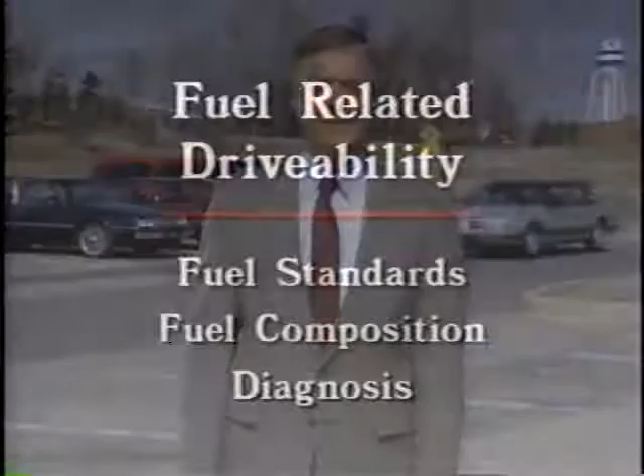We're at the GM Proving Grounds to look at part of the fuel story. The emissions lab here at the Proving Grounds tests a wide variety of automotive fuels to assure that all GM vehicles perform up to specs and meet every EPA emission standard. Let's begin by looking at fuel standards and composition. The emissions lab tests consumer-marketed fuels to set the standards for new vehicle computer calibrations.

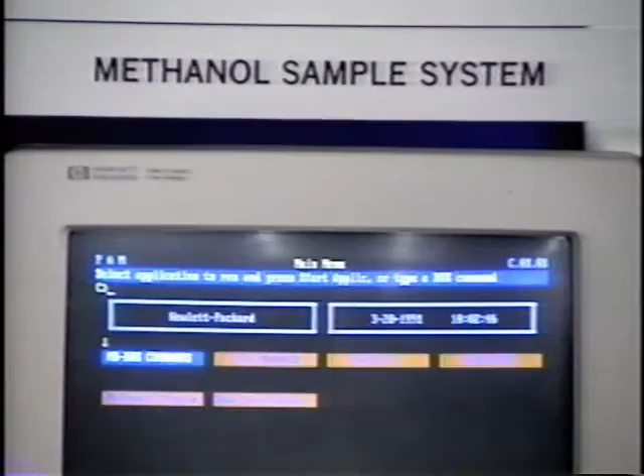Joining me here in the emissions lab is Les Milvick, a GM fuels engineer. Hi, Ken. Les, is choosing the right fuel, a good gasoline, really a matter of luck? You might say that, Ken. In the real world, motorists buy generally what's available. Our advantage here in the lab is that we actually distinguish between good fuel and bad fuel.

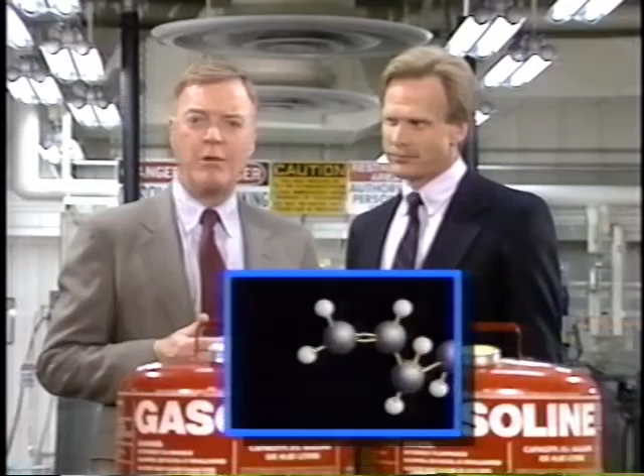The common automotive fuel, gasoline, is composed of liquid hydrocarbons. That's correct. Now, a hydrocarbon molecule contains hydrogen and carbon. There are hundreds of different hydrocarbon molecules that make up gasoline. And because there are thousands of ways to mix or blend gasoline, each oil company makes their gasoline just a little bit different. But there are only three primary hydrocarbon types in gasoline: aromatics, olefins, and paraffins.

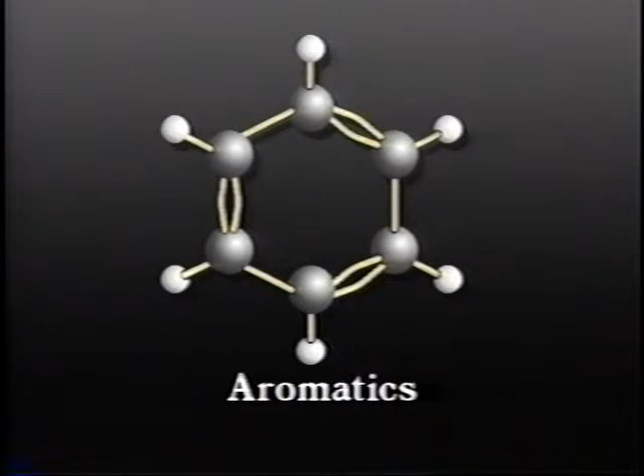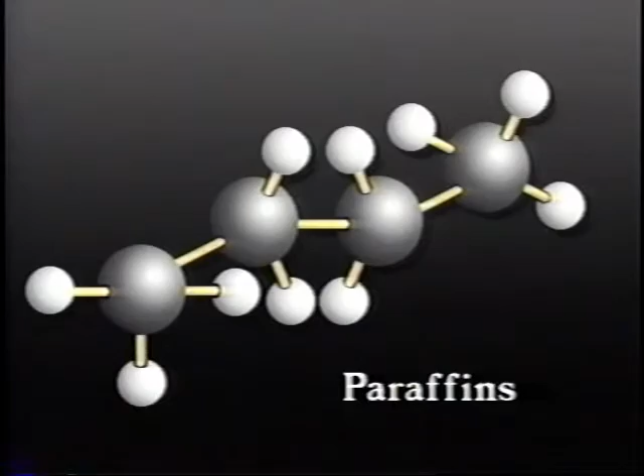Aromatics have a circular carbon arrangement. Olefins have a carbon double bond. And paraffins have a carbon single bond. Now, this equipment divides a gasoline sample into the separate aromatics, olefins, and paraffins. Yes, and this instrument does that separation. And that information is transferred to this computer, and on this screen I can see each individual hydrocarbon. Then I can take and group that information into aromatics, olefins, and paraffins.

Olefins and aromatics contribute to the octane quality of the fuel, and the paraffins make up the balance of the fuel. Aromatics, olefins, and paraffins exist in simple and complex form. In other words, small and large form. And the smaller paraffins are very volatile, meaning that they evaporate very quickly. That helps start the engine in the morning. The large paraffins are less volatile, but contain more energy.

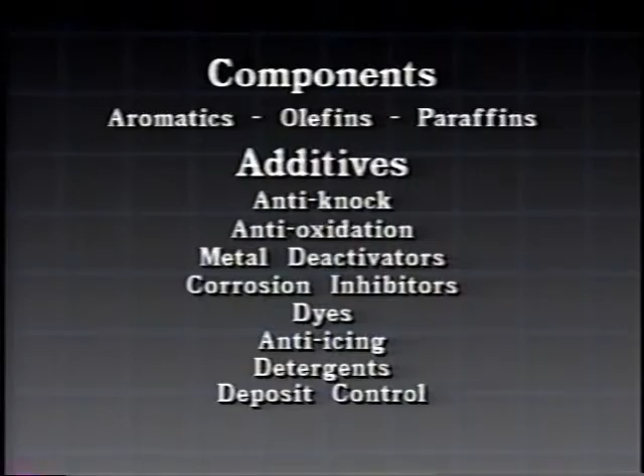In addition to gasoline's three major components, oil companies blend anti-knock agents, anti-oxidation agents, metal deactivators, corrosion inhibitors, dyes, anti-icing agents, detergents, and deposit control agents to improve performance. For example, most fuels contain detergents and deposit control additives that help prevent and remove deposits which are formed in the combustion areas of the engine.

To help ensure performance, the American Society for Testing and Materials, commonly known as ASTM, sets standards for automotive gasoline. ASTM D4814 is the current specification for gasoline. Octane, volatility, copper corrosion, gum content, sulfur content, lead content, and fuel stability are defined. Of the regulated factors, octane and volatility directly affect drivability.

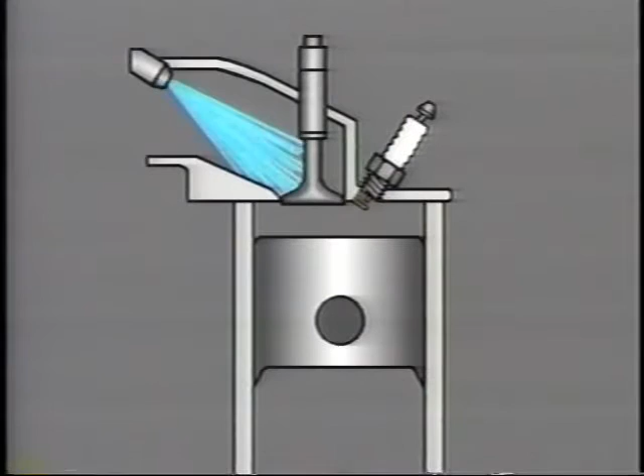During normal combustion, fuel mixes with air and evaporates before entering the cylinder. During combustion, the ignition system sparks the compressed air-fuel mixture. In a rapid, even progression from the spark plug across the top of the cylinder, the flame front advances and consumes the air-fuel charge. The heat generated from the burning fuel expands the cylinder contents dramatically. The force created from this expansion drives the piston downward.

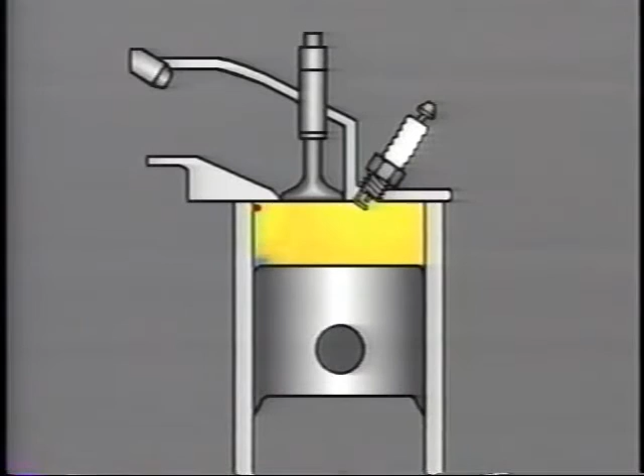Engine knock occurs after the spark plug fires, but before the normal flame front consumes the air-fuel mixture. Now in this case, an uncontrolled explosion of the compressed air-fuel mixture occurs from a red-hot engine deposit in the cylinder. If engine knock is not corrected, then serious piston damage may occur. Octane is a measurement of a fuel's anti-knock capability. The higher the octane number, the higher the anti-knock capability.

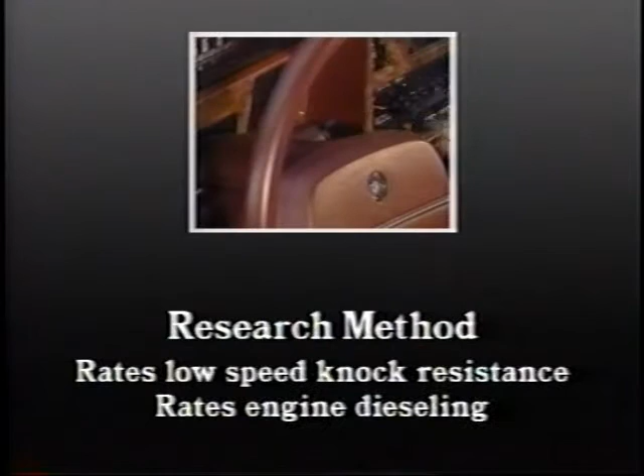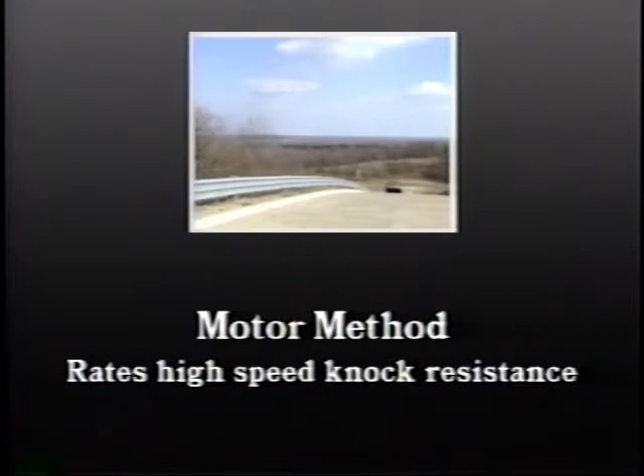Octane is rated using the average of two methods of testing, the research method and the motor method. The research method rates a fuel's ability to resist engine knock during low to medium speeds and to prevent engine dieseling or run-on. The motor method rates a fuel's ability to resist engine knock at part throttle and high speed, such as passing or hill climbing. The pump octane number is the average of the research and motor numbers.

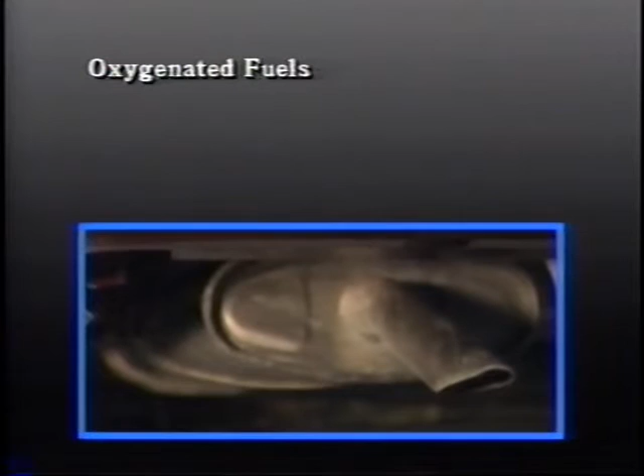Previously, lead-based additives served as octane boosters. Now, since lead is no longer a fuel component, oil refineries have been forced to find new octane boosters. Oxygenated fuels is one answer. Oxygenated fuels raise octane and lower tailpipe emissions. Gasolines with either ethanol or methanol added to the blend are two examples of oxygenated fuels. Ethanol and methanol are alcohol-based anti-knock additives.

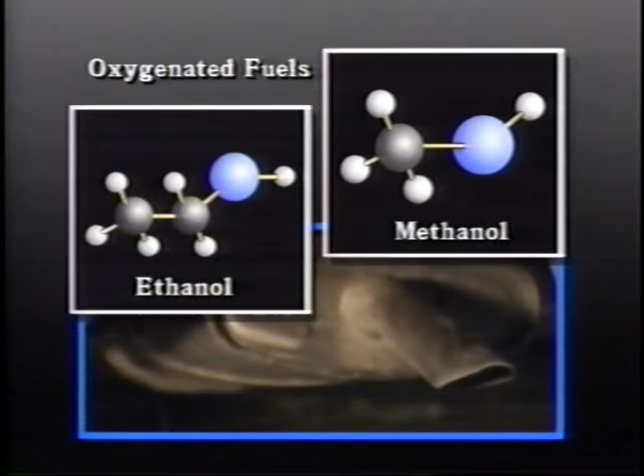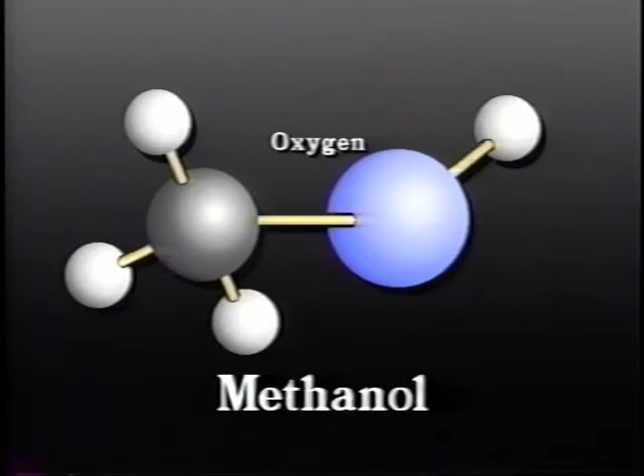Ethanol has the ability to absorb water, preventing fuel line freeze-up. But ethanol only absorbs water to a point. Beyond that point, however, any excess water causes the ethanol to separate from the gasoline. Methanol is 50% oxygen, so methanol raises fuel octane and volatility. Methanol is highly corrosive. GM recommends only using gasolines with 5% or less methanol.

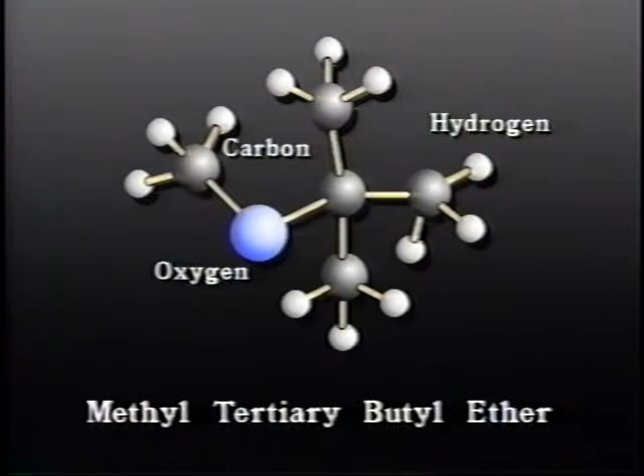Another oxygenated fuel is gasoline blended with methyl tertiary butyl ether, or MTBE. MTBE raises octane and is less sensitive to water than ethanol. The most common MTBE concentration in gasoline is about 8%, equivalent to about 1 octane number.

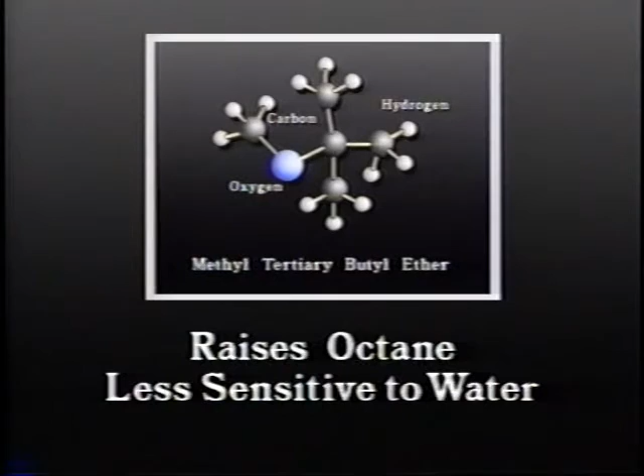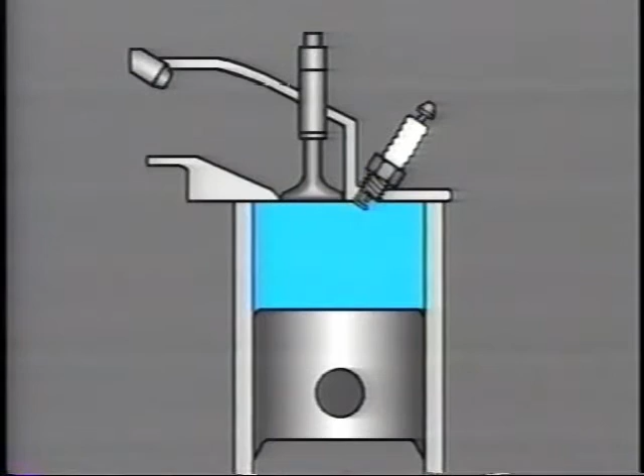Okay, now let's talk about volatility. Volatility is the fuel's ability to change from a liquid to a vapor. And that's pretty important because only a fuel's vapor will burn and not the liquid. But the evaporated and compressed fuel in a cylinder just doesn't burn when the plug fires, it explodes.

Nonetheless, summer blended fuel evaporates slower than winter blends and has a lower volatility. This prevents excessive evaporation and vapor lock. Winter blended fuel evaporates fast and has high volatility. This promotes good cold starting ability.

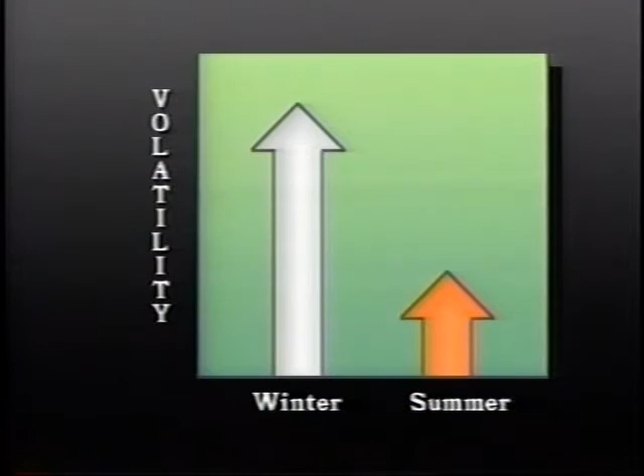In recent years, fuel volatility has generally decreased. This drop in volatility is significant. In fact, using 87 pump octane fuel may actually improve performance because the higher octane additives increase octane but decrease volatility.

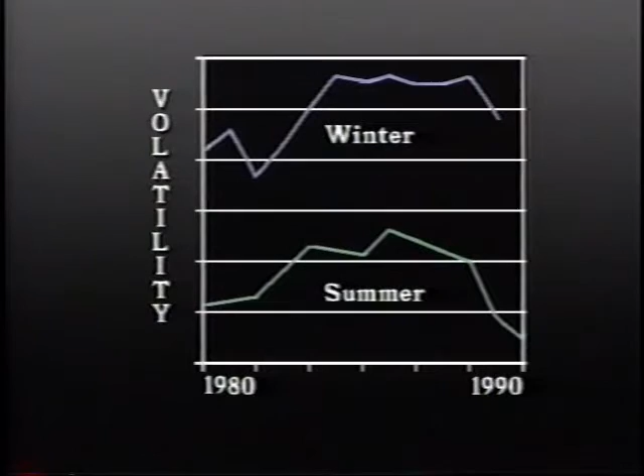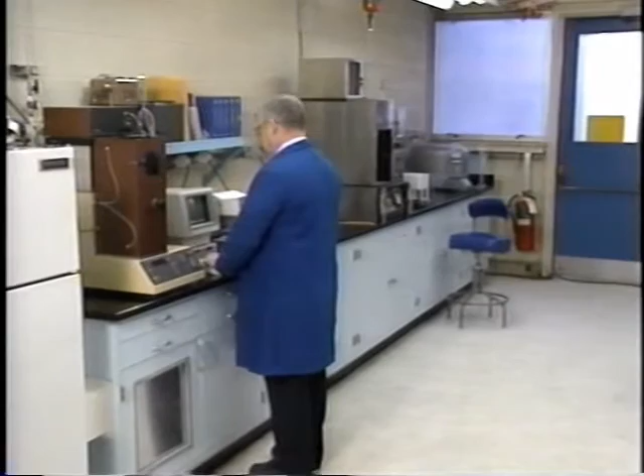Well, Ken, that about does it for theory. Well, thanks very much, Les. Would this be a good time to talk to Auburn Perkins? Now, that's a good idea. Auburn does all of our fuel analysis testing in this laboratory. This is General Motors Fuel Testing Lab, and this is Auburn Perkins. Auburn, nice to see you. Hi, Ken. Auburn, would you tell us exactly what it is that you do here?

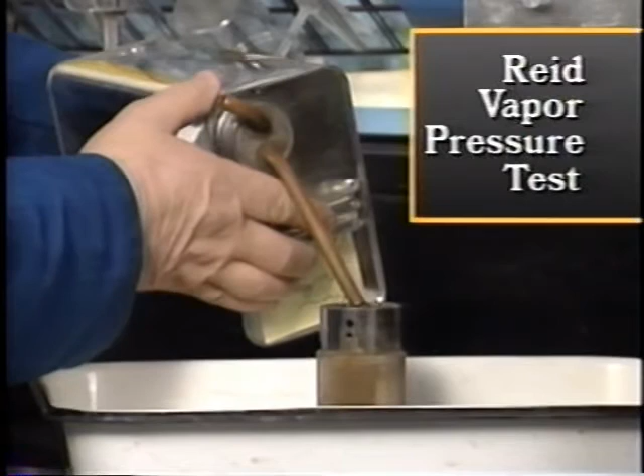Sure, Ken. This is a fuel lab where we check all incoming fuels to make sure they meet specifications for our test vehicles. First of all, we do a Reid vapor pressure test, a distillation curve, and fuel separations. Okay. Where do you start? With the Reid vapor pressure test. Before testing, we chill the fuel samples. They must be between 32 and 34 degrees Fahrenheit. Okay. A precise amount of fuel is poured into a test cylinder and sealed.

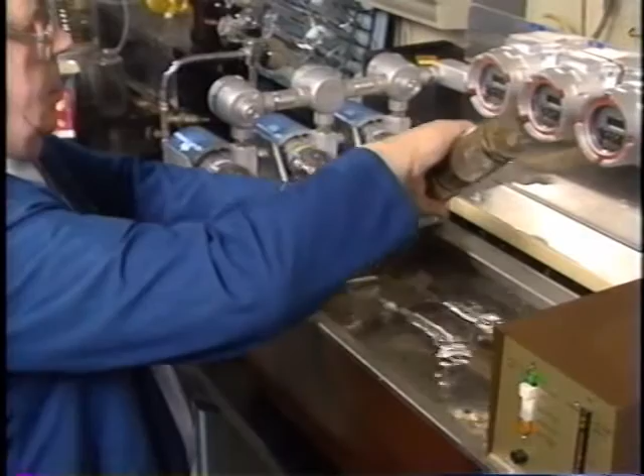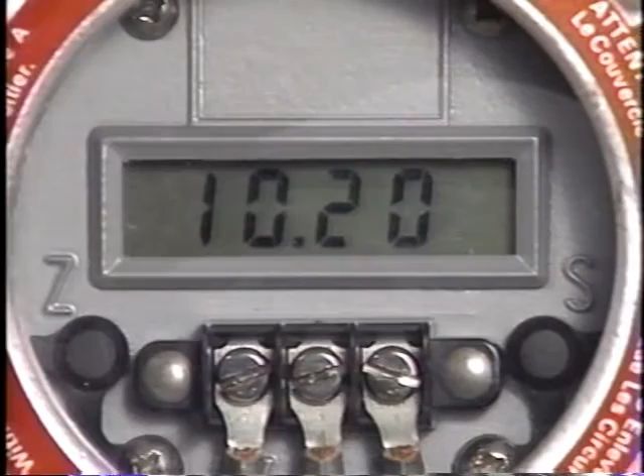The water bath temperature is held at a constant 100 degrees. When I immerse a container, the water heat makes the fuel vaporize. We measure the pressure created by the test. This fuel is at 10.2, which is typical of today's fuels. This is the Reid vapor pressure that's used to rate the volatility of all motor fuels? That's exactly right. Okay, and that's the same process used by the gas check kit available to a dealership. Right. Good.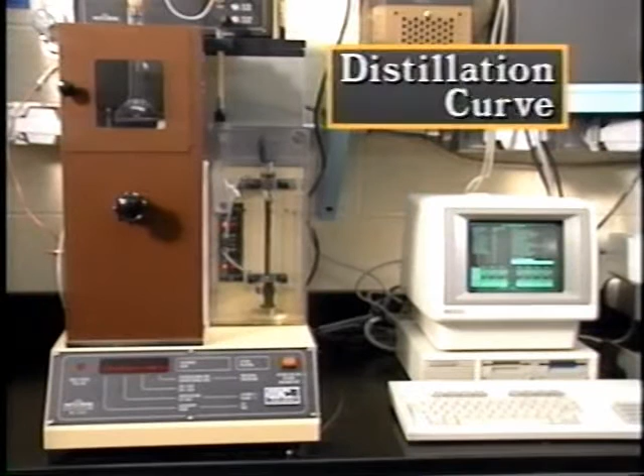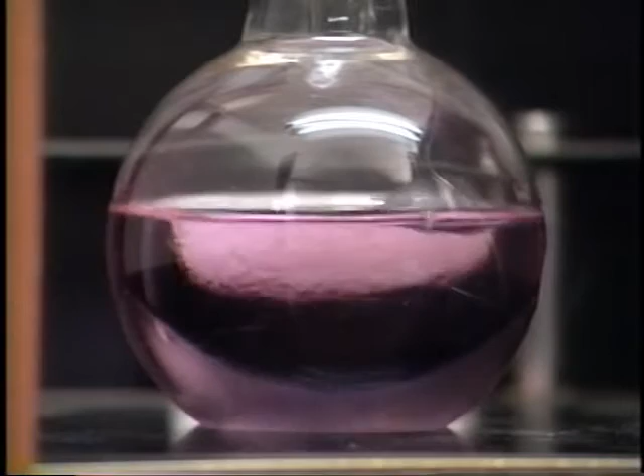And now would be a good time to do a distillation curve. All right. In this test, fuel is boiled and evaporated. The distillate is processed and it's measured. Sensors feed information to a computer. The printout shows the temperatures where fuel starts to boil, how it boils, and when the fuel stops boiling. The curve printout shows the exact volatility property of the fuel anywhere on the curve.

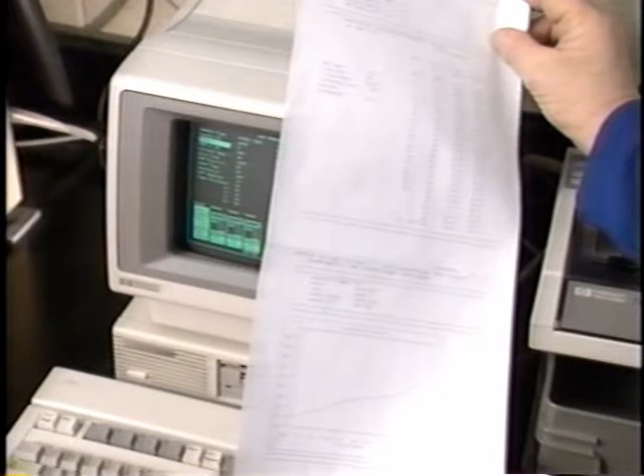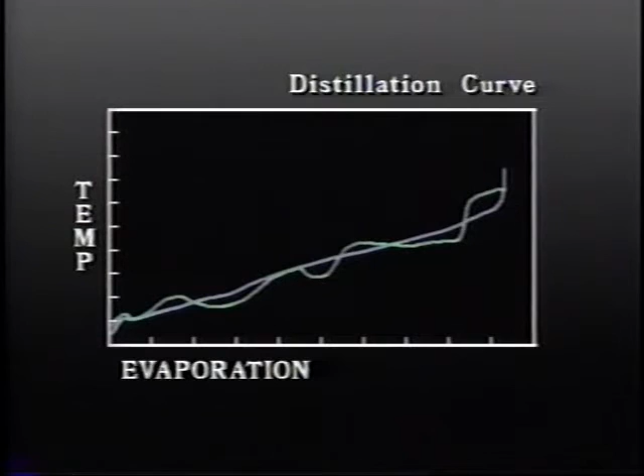This graph shows the curve of a good fuel. The second graph shows the curve of a bad fuel. Notice the raised areas. This shows where fuel performs poorly. If an affected temperature range is critical to cold drivability, hard cold starts could easily result.

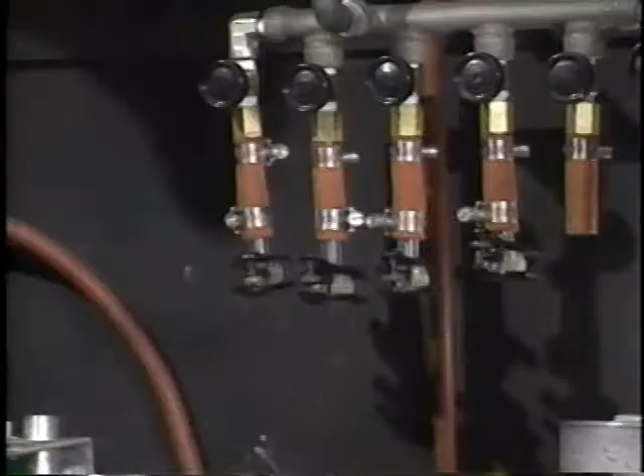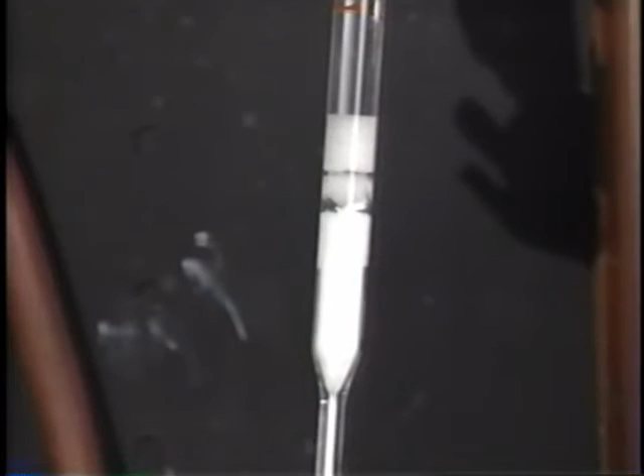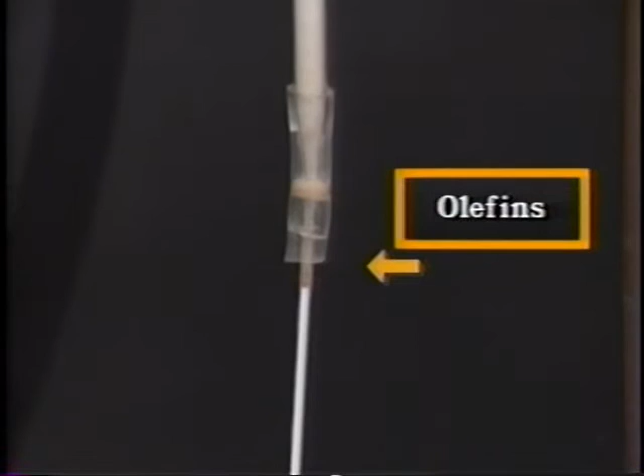This test separates the three major fuel components. Fuel is injected into the top of a glass tube filled with silica gel. The tube is attached to a pressure source. Air pressure forces the fuel down through the silica gel column. The fuel separates in the silica gel. Special dyes and the use of black lights help distinguish the separations of the aromatics, olefins, and paraffins.

Technicians need to know about bad fuel as it can cause many drivability problems. You're right, Auburn. And Auburn, we'd like to thank you very much for your cooperation and for your insights into today's fuels. You're welcome, and come by anytime, Ken.

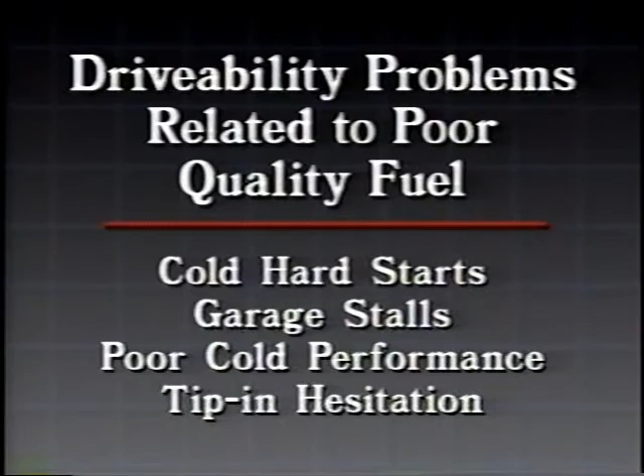Drivability problems, especially cold drivability problems, are getting tougher to solve, and that's because volatility is getting lower in order to reduce emissions. In fact, depending on the part of the country, the Clean Air Act amendment limits Reid vapor pressure, RVP, to between 7.8 and 9 pounds per square inch for 1992 summer fuel. Now, the only thing certain about future fuels is a lower RVP.

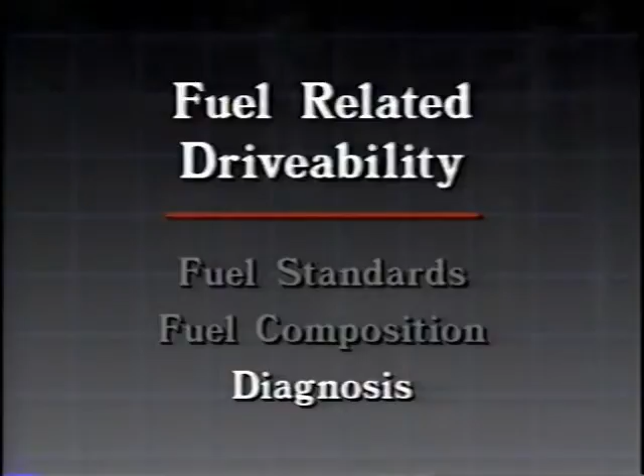Well, that's the first portion of our fuel story. For the other portion, let's see how service technicians diagnose fuel-related drivability complaints. Cold, hard starts, garage stalls, poor cold performance, tip-in hesitation. While good fuel contributes to good engine performance, poor quality fuel contributes to poor engine performance.

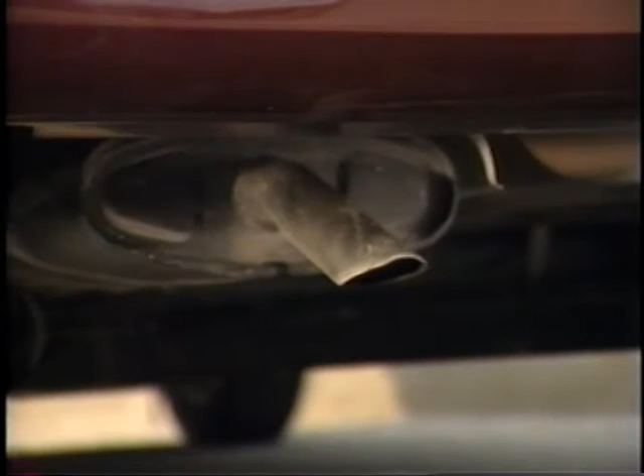If the fuel is not very volatile, unburned fuel may end up in the exhaust. The oxygen sensor picks up a high oxygen content, indicating a lean air-fuel mixture. The ECM or PCM demands a rich mixture. This compounds the drivability problem. Vehicles, like the one on this dynamometer here in the emissions lab, respond to something outside their control, and that's poor quality fuel. Another fuel-related problem is valve deposits.

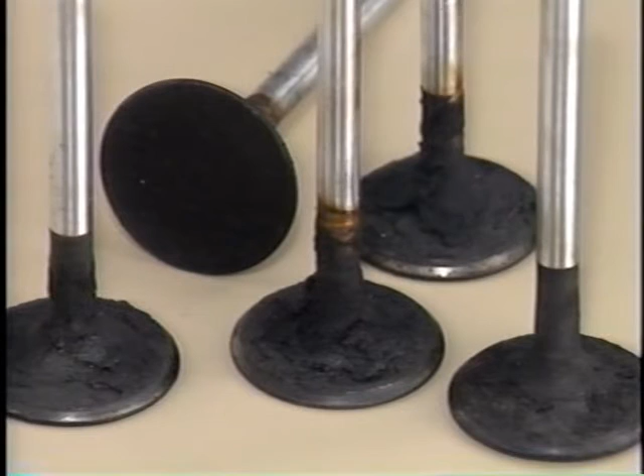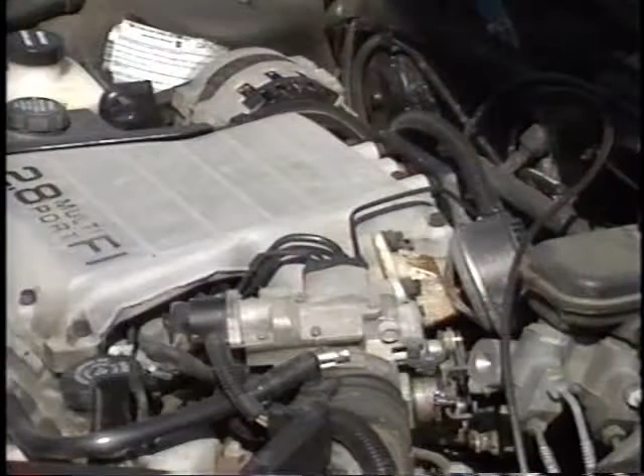Now, valve deposits are minimized by deposit control agents, and many gasolines have this additive. Valve deposits are either porous or non-porous. Non-porous deposits are not a problem, but porous deposits soak up fuel, and that leans the air-fuel mixture for a moment. And that's just enough to cause tip-in hesitation, especially for 2.8-liter and Quad 4 engines.

For very heavy deposits, remove the valve from the head. Use a wire brush to physically remove valve deposits. Recommend changing to a gasoline with deposit control to prevent reoccurrence.

For fuel-related drivability complaints, apply a 4-step diagnostic approach. First of all, verify the complaint. Second, verify correct operation of the fuel delivery system. Third, verify correct operation of the fuel control system. Fourth, test the fuel quality.

The first step is to verify the complaint. For example, cold start trouble means the vehicle should stay overnight for a cold start evaluation. Now be certain that an actual problem exists.

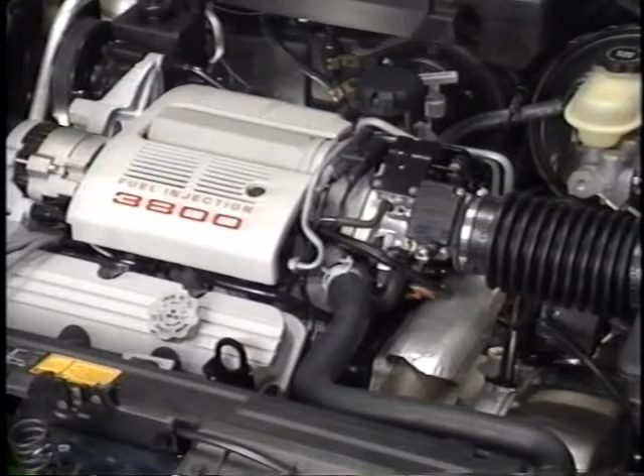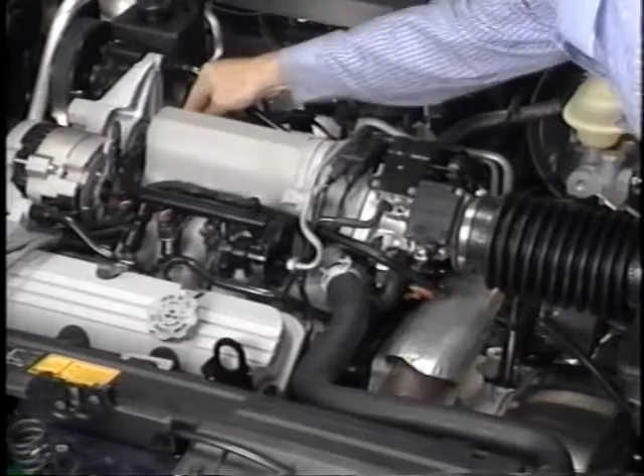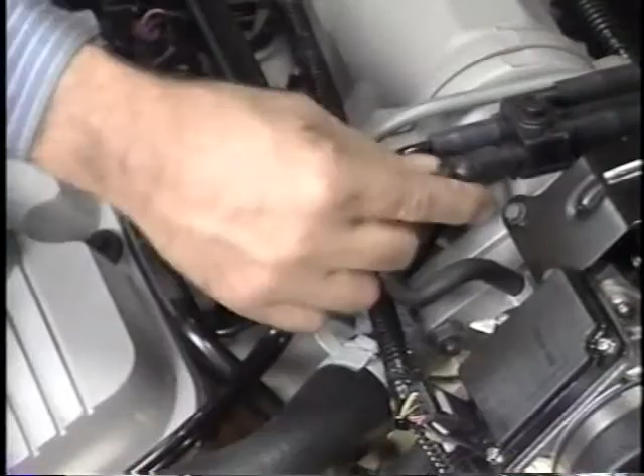Second, consult the Know-How 123 manual for specific symptoms and the related fuel system tests. Inspect and test the fuel delivery system to verify that fuel enters each cylinder in equal amounts. A close visual inspection of the delivery system may locate an obvious cause. For example, a kinked or split fuel pressure regulator vacuum hose.

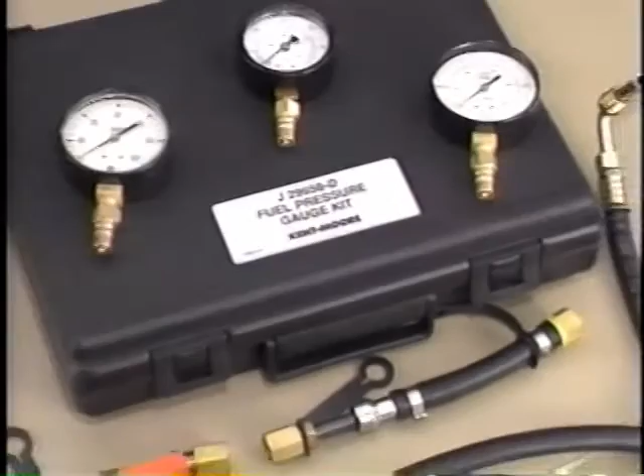Then, check the fuel pressure. On PFI engines, check fuel pressure with Tester Kit J34730C. On TBI engines, check pressure with fuel pressure gauge J29658D. Cold start trouble could be low fuel volume, caused by a clogged fuel filter. If fuel pressure and volume is okay, verify fuel control operation.

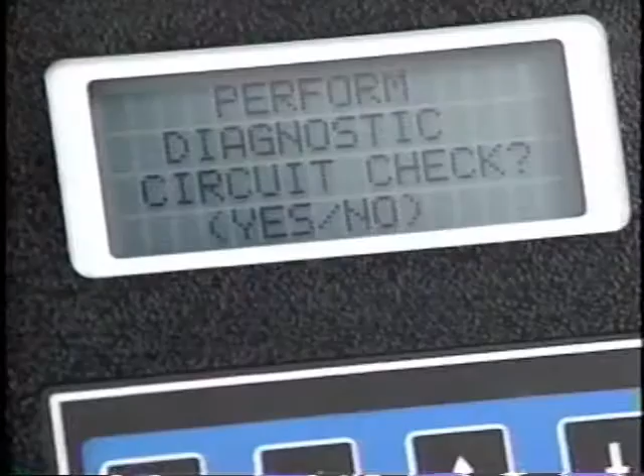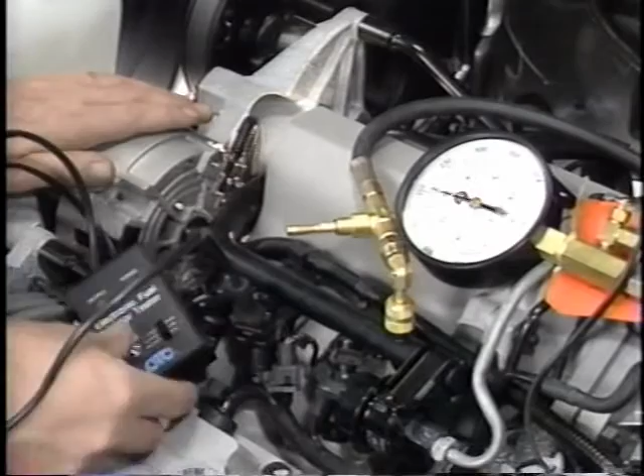The fuel control system is checked by performing a diagnostic circuit check. Look for any codes. Fuel-related drivability problems may not set a fault code. If no codes are stored, use a scan tool or T100 to see that the proper PROM is installed. Once PROM ID is correct, perform fuel control tests. Fuel control tests consist of a fuel injector balance test or a fuel injector driver test.

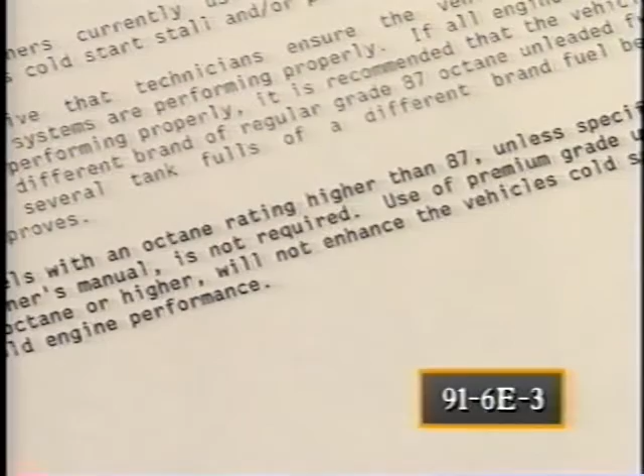For example, on a cold hard start, once the conclusion is reached that the vehicle is operating properly, test the fuel in the tank. Service Bulletin 916E3 reports that switching to a different brand of 87 octane unleaded fuel may solve a cold hard start complaint. The bulletin specifies that it may require several tankfuls of a different brand fuel before the condition improves.

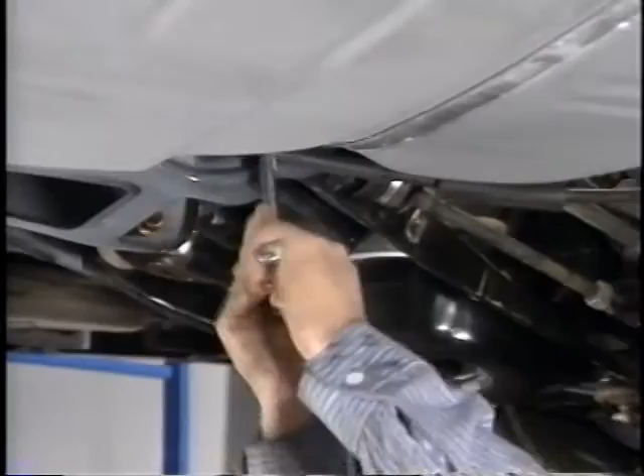Fuel quality testing is a critical part of the fuel system diagnosis. One method of testing the fuel is to drop the fuel tank and look inside, at the bottom of the tank. Water forms a separate layer there. The fuel should be clean and bright, not cloudy. If the Kent Moore Gas Check Fuel Test Kit is available, use it to detect water and measure fuel vapor pressure.

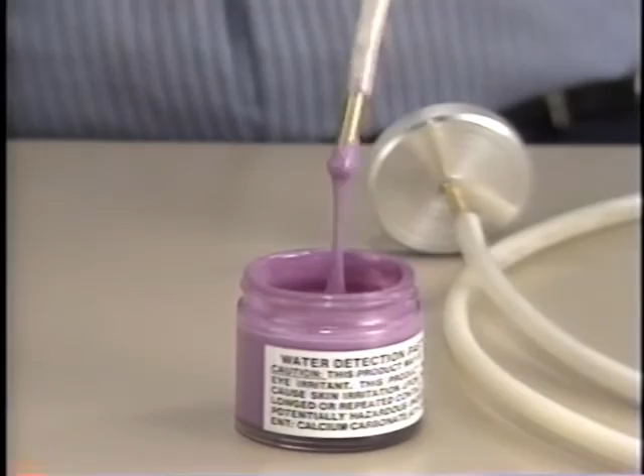The basis of the water test is to coat the tip of a special flexible rod with a paste which changes color if it contacts water. Insert the flexible rod into the fuel filler until it reaches the bottom of the tank. Expose the coated tip and then return it into the plastic cover and bring the tester out of the tank. If the color of the paste is noticeably whiter, water is in the tank. The tank should be dropped and the entire fuel system cleaned.

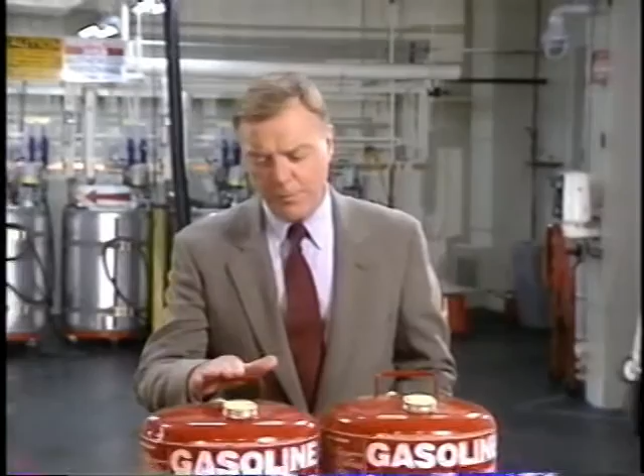The vapor pressure test is a good indicator of the volatility of the fuel in the tank. One fact about fuel is that volatility decreases over time. In other words, a tank of good fuel may eventually turn out to be a tank of bad fuel, which causes drivability trouble.

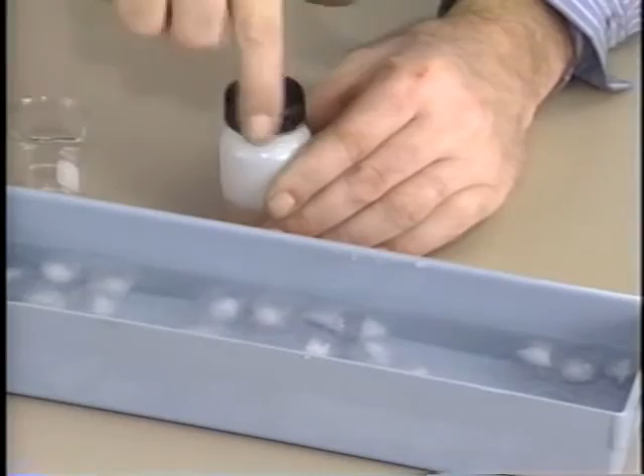As a part of the volatility test, a chilled gasoline sample is placed in a sealed, heated container. The heat from the container vaporizes some of the fuel. A pressure gauge measures the pressure exerted by the evaporated fuel vapor. This indicates the fuel sample's volatility.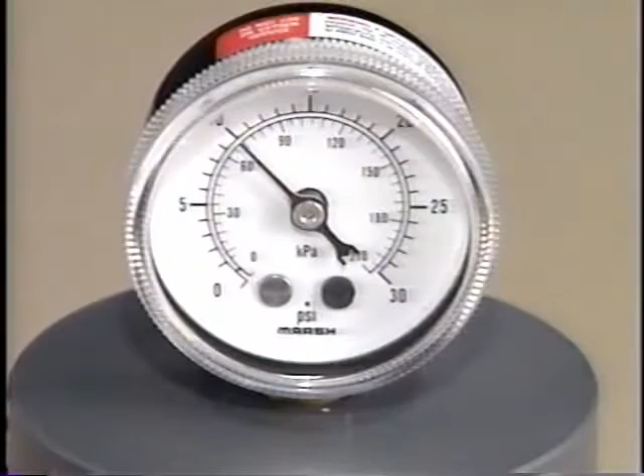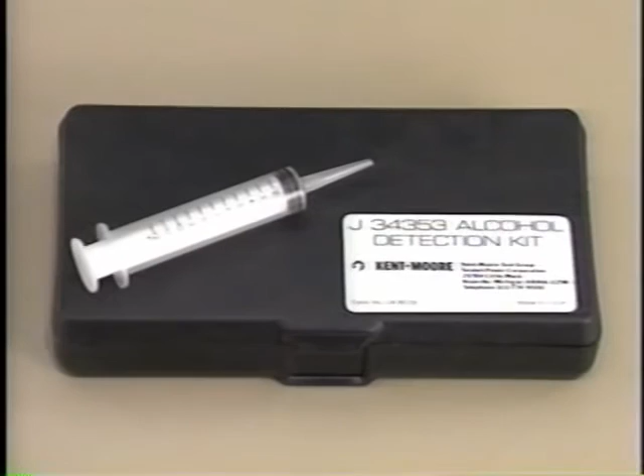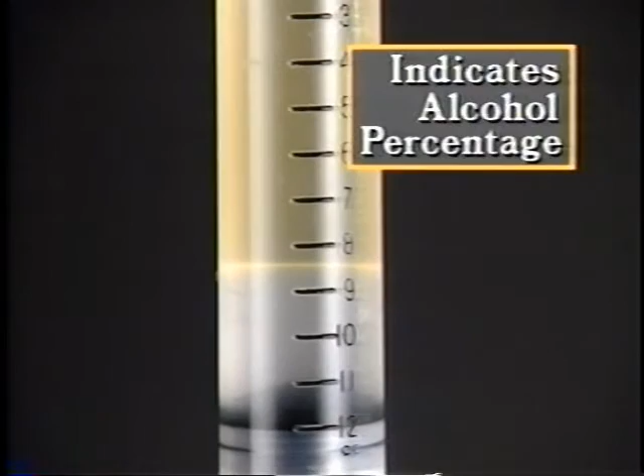Use the alcohol test kit J34353 to indicate the alcohol percentage in a fuel sample. The test cannot distinguish between the type of alcohol present in the gasoline. The result simply indicates the percent of alcohol in the sample. Fuel with excessive alcohol content should be drained and replaced with fresh 87 octane unleaded fuel.

After completely testing fuel system operation and, if necessary, replacing the fuel, verify the vehicle's cold starting ability. How can you distinguish between good fuel and bad fuel? It's simple. Use the proper fuel testing equipment if it's available. If the test equipment is not available, eliminate the vehicle as the cause of the drivability complaint and then switch to fresh 87 octane fuel. Your customers will be pleased to find that their Buick is performing the way it should. And it's because they've now got the right fuel in their tank.